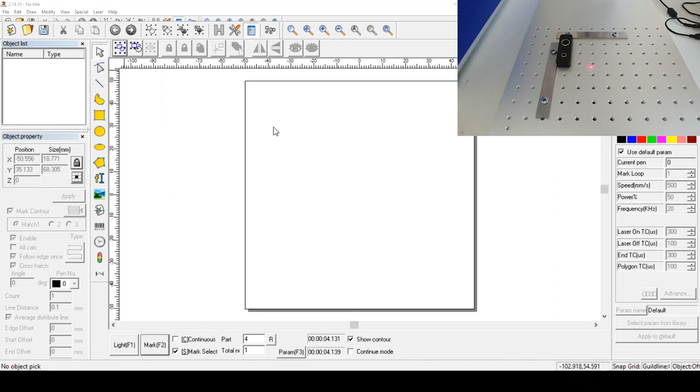So first I'll open my sketch that I imported into EzCad. For our purposes, I've already saved my imported DWG as an EzCad file, so I'm just going to click open, and I'm going to choose this tight sketch. It's got an EZD ending to it, and you'll see that pops up here.

I'm going to click this auto size button, so that zooms directly to resize, so it's in my field of view. One thing that's interesting about EzCad that's pretty similar to most CAD programs is that if you highlight something...

from left to right, it won't select that. See, this tight is all one sketch, it's all one object. So if I click it, you can see it's one object. It doesn't include this text down here, the patent pending. So if I go left to right, it won't select it unless I choose the entire body of text.

Now if I go right to left and I choose any part of this, it selects the entire thing. It doesn't include the patent pending, that's a separate thing. You can see over here that one is the hatch, which just means I filled in the text, it wasn't outlined. And this is the combine, which is actually text I created in EzCad directly. That was not imported from CAD.

So if I go right to left and I choose any part of the patent pending, it chooses the entire thing. And if I have this mark select button checked, this little checkbox down here on the bottom left, that's going to say if I mark right now, then it's going to include everything that's selected on the screen.

If I just have the tight selected and I choose mark select, it'll just mark the tight and not the patent pending.

So what I want to do now is see how this shows up on my part. All I'm going to do is choose the entire thing, and you don't have to choose mark select. If you unselected that, it would mark everything that's on your screen anywhere. Sometimes you'll have multiple things on the screen at once and you won't want to mark everything. That's the purpose of that.

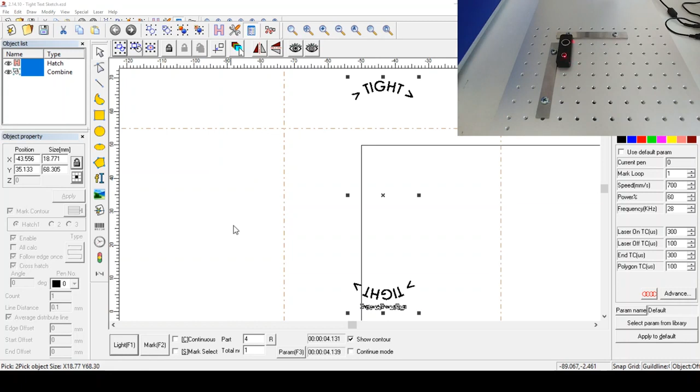I'll press stop, and I'll send it back to where it was. So we'll just light it again to make sure it's in the right spot. And that looks pretty good.

So I'll press stop, and we'll do a test mark just to make sure it's okay. I'm going to choose mark select just because I like doing that. Down here it says it's going to make one part, and we've made a total of 4 parts.

I'll reset the counter. Our settings over on the right side here say that we're going to use the default pen, and we have the frequency set to 28. I think the lowest you can go is 20, that would be the most powerful, and 60% power. Speed is going to be 700, that's kind of in the middle. You can go anywhere from very slow to over 1,000 millimeters per second, which is pretty fast.

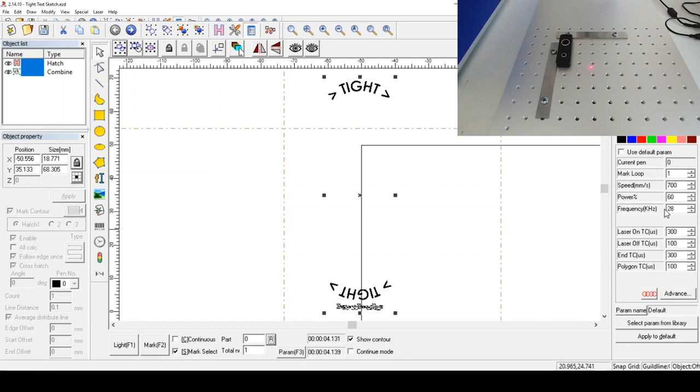So I'm going to mark this part just to see how it looks. So a couple seconds to mark it.

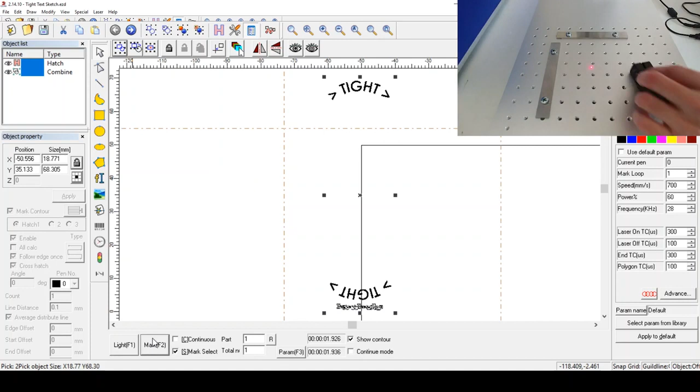Looks pretty good. So now I want to say, let's mark a bunch at a time. How do we do that? So let's say I just want to mark 3 at a time. Now there is a top and a bottom to this part, so I want to make sure it's oriented correctly.

So what I'm going to do is keep the entire thing selected, and I'm going to go up to this modify button at the top. I'm going to choose array, and I'm going to choose rectangle.

These 2 buttons up here just control the order in which it marks your array of, let's say, sketch objects. I don't really care if it goes left to right, top to bottom, whatever it wants is fine. I'll go left to right.

So I want 3 of these next to each other, so my number of X objects is going to be 3. I'm just going to have one row, one column, one row, 3 columns, so I'm going to say 1. I don't want to repeat this in Y.

It's pretty much the exact same as patterning something in regular CAD software. For array X distance, these are 1-inch parts, so I'm going to go over 25.4 millimeters, 1 inch, and I'm not going to have any Y, but if I were, and I were doing 2, these are 3-inch parts, so it would be about 76.

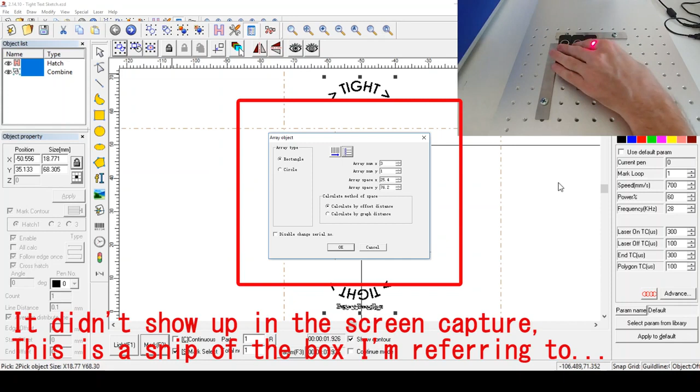For our purposes, I think it's a lot easier since I have the parallels laid out, just to say from center to center, it's 1 inch. So that's all I'm doing there, and I press OK.

It will create the duplicates, and all I'm going to do is press zoom all again to put everything in the center. I'm going to highlight all 3 of these, and you can see everything on the left here is selected, all of the objects.

I'm going to press light, and you can see how that shows up when it's lit. Kind of goes across every single part you have there. I'm going to press stop, and if you want to make sure that your spacing is correct, you can just select one of these. It's a little bit easier to see, and press light, and you can just see how it looks on the 3rd object.

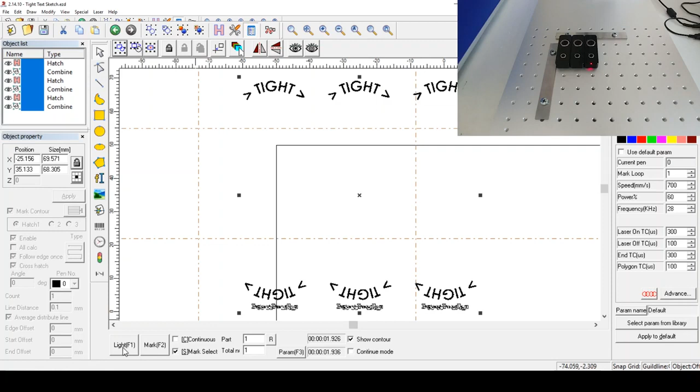And I'm pretty happy with that. So I'm going to choose all 3 objects at once, and you can test mark 1 and then replace it, whatever you're comfortable with. So I selected all 3 of these at once, have the mark select button checked, kept all my settings the same, and now I'm going to mark them.

And you can see that marked from left to right. Looks like it came out pretty good.

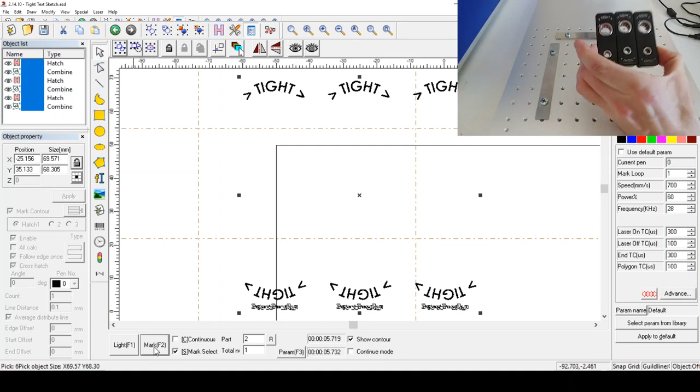I have done as many as 10 of these at once by doing 5 per row. The upside to doing that is you just click it and you can walk away for a minute or so. The downside is if you misposition a part, or if you put something in upside down, you could end up scrapping 5 parts or more at once, which I have done, and that's not so good.

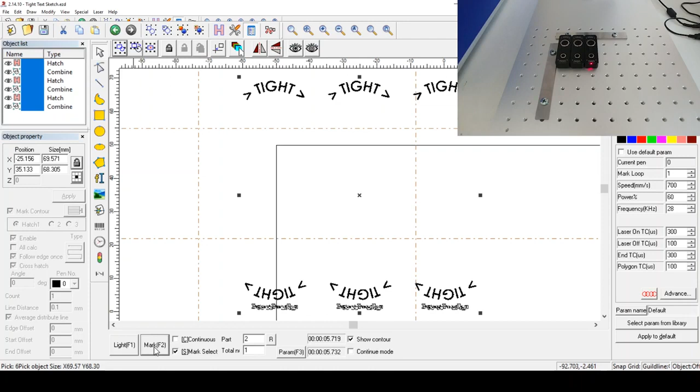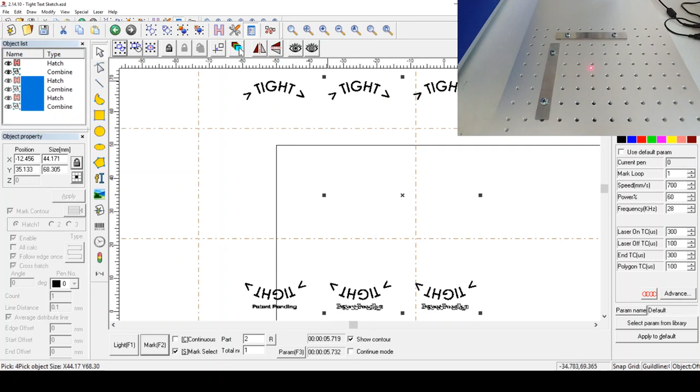So let's try to do 2 rows now. We don't have to start from all 3, let's get rid of this first array. I'm going to highlight this again. I'm going to go into modify, I'll go into array, and this time we're going to still do 3, and then let's do 2 rows.

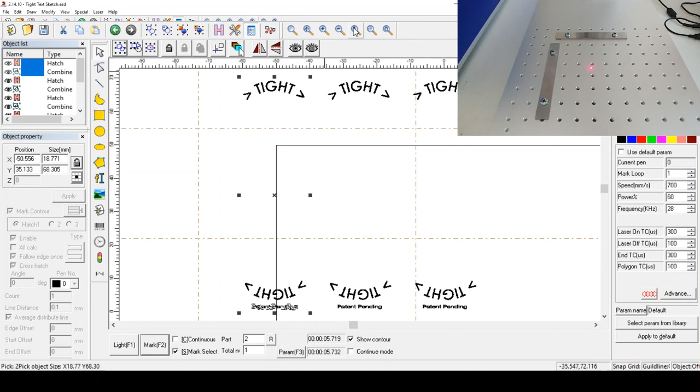So I'm going to keep my 76.2, and we'll calculate by offset again. So I'm going to say OK. Now we have 6 total parts here, and I'm going to do the exact same thing we did before, but I'm going to load 6 of these this time.

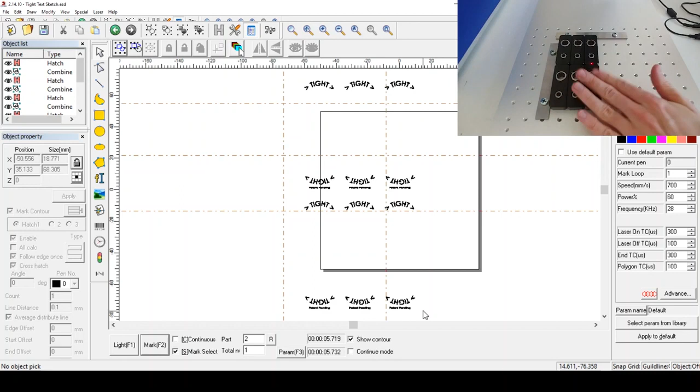Now I'm going to select the bottom right part, and I'm going to light it just to make sure I'm in the right position. That looks pretty good. And I'll select this one as well just to make sure I haven't made any errors. That looks fine.

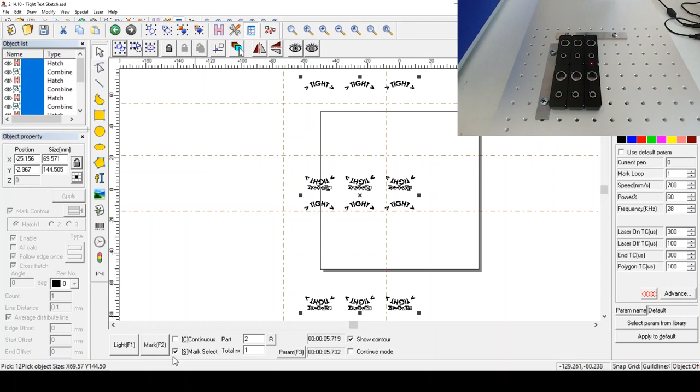So I'm going to select everything and keep my mark select box checked, and I'm going to go ahead and mark. So that looks like it worked just fine.

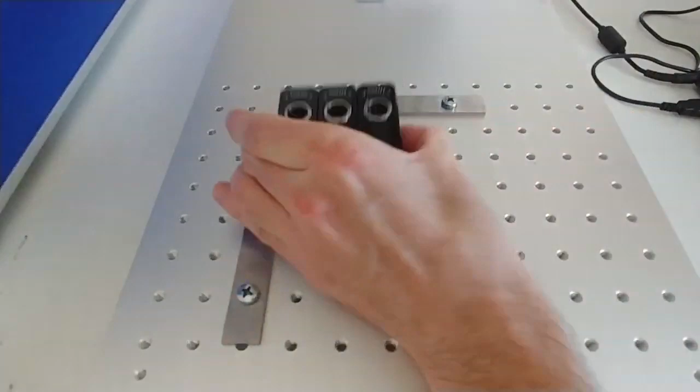So you can see it's a little bit faster if you can load 6 parts at once versus 1 part at once. Only downside is you increase your risk of scrapping things just a little bit. And it can sure be fast to scrap parts, especially since this is probably the end of the process here, after you've got all the money put into your part.

But I just wanted to show you, this is one of the things that I was wondering about when I bought the laser and when I started using EzCad. Could I do this? Was it easy to mark multiple parts at one time? And I found that, yeah, not a big deal. So hope that's helpful. If you have any questions, go ahead and leave them in the comments.